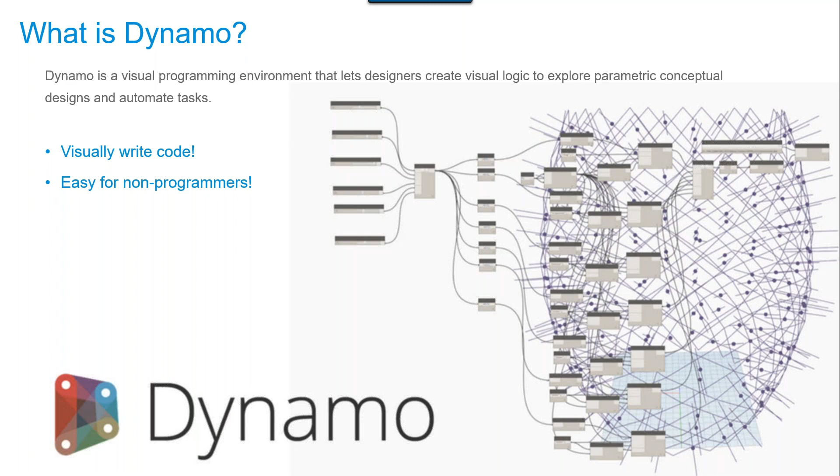But before he shows you how to work inside that environment, we want to talk about why you would want to use Dynamo. So we came up with our top 3 reasons why you would want to use Dynamo, specifically in Civil 3D. Number 3: you can create many design options much faster.

Imagine your last land development project where you had to create a number of different sketch plans for your client. Let's say you had to lay out a parcel of land and divide that land up. You can spend days brainstorming and laying out parcels and different sketch plans. You give it back to your client, they don't like any of them, they wanted to do something completely different, and now you're back to the drawing board.

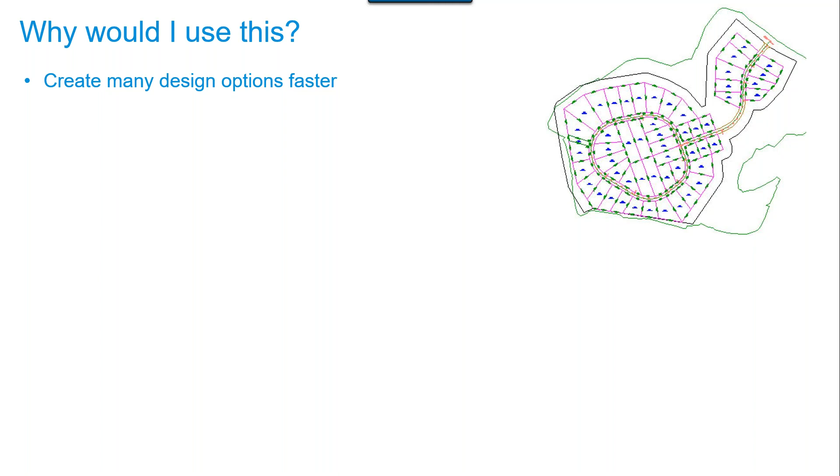So using Dynamo, you can actually enhance some of the Civil 3D tools like parcel layouts and automate different parcel layouts at the click of a button, which ultimately provides you less work and better results for your client.

At number 2, we can also access the data within Civil 3D. We all know there's a lot of information inside our designs, and we want to be able to look at that information and do something else with it. Dynamo works directly with AutoCAD and Civil 3D objects, things like alignments, Cogo points, layers, lines, text, etc.

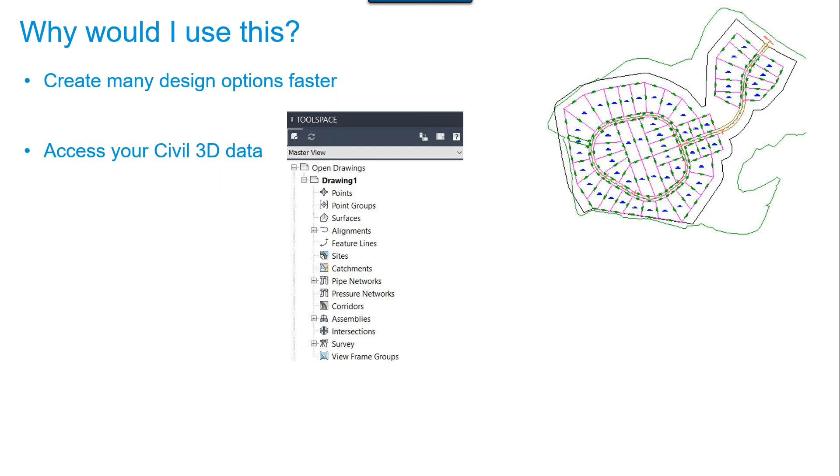And last but certainly not least, the number 1 reason why we use Dynamo is to automate our repetitive tasks, ultimately reducing the number of clicks and picks.

I don't know if any of you have heard of Matt Murphy. He's a seasoned speaker, and he said something in one of his classes that really hit home with me. He said working faster does not make us more productive. You could know several commands really well, but the only way to be more productive in AutoCAD or Civil 3D is reducing the number of clicks and picks. That's really why we use Dynamo, to reduce the number of clicks and picks and ultimately make us more productive.

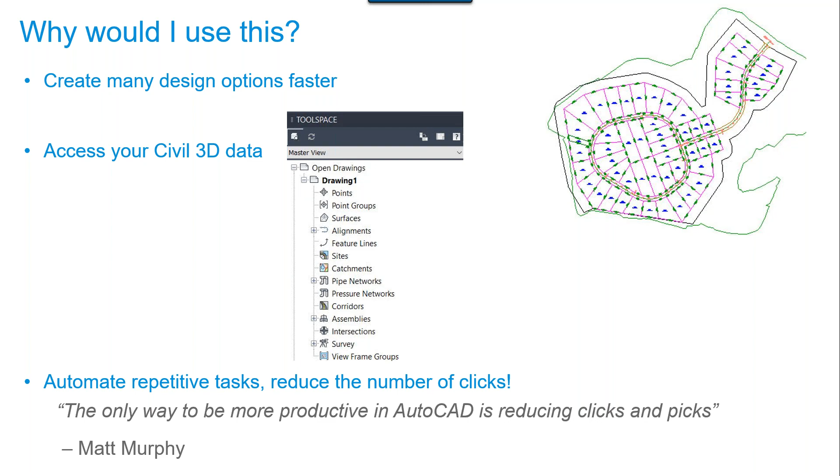So with that, I am going to pass it off to Dylan here, who's going to walk you through one of the challenges that we've laid out to ultimately reduce those number of clicks and picks. So Dylan, I'm going to pass this off to you at this point.

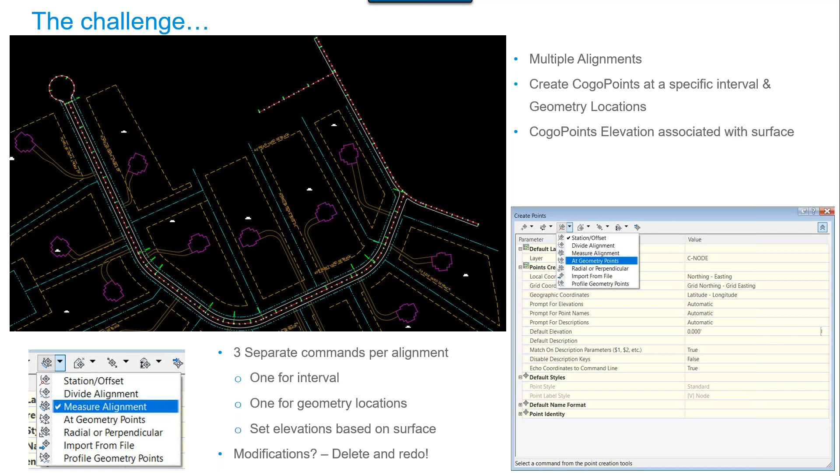So this is a screenshot of the end goal of our script or graph, as Stacy mentioned. The first step is we are going to get all of the alignments that are in the current drawing, and then we're going to get those stations at whatever specific interval and geometry points at the same time.

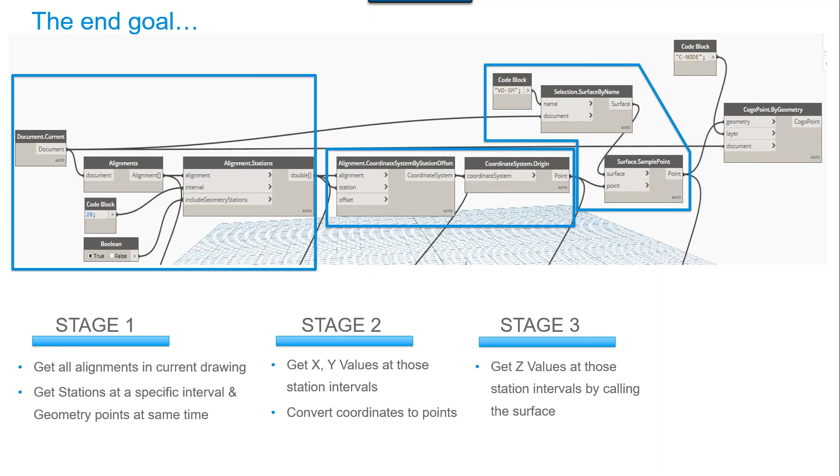After we have these station locations, we're going to have to get those X, Y values of where they actually are, and then we'll convert those coordinates to points. Once we have our points, we need to get a surface elevation, that Z value.

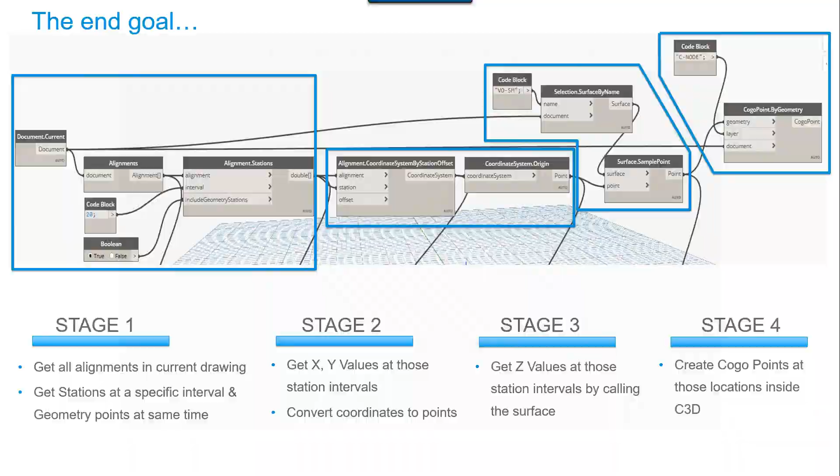And so we're going to have to select that surface and then grab that Z value. And finally, once we have all of that information, we are going to use it to create a Cogo point at those locations. And with that, Michelle, if you could pass the control to me, we'll hop in the program and we'll show you what we can do.

All right, you see my screen? Yes. All right, great. So here we have a Civil 3D drawing file, and you can see here we have a number of alignments that run through the roadways.

And on the Manage tab of Civil 3D 2020, to the right here, you'll see there's this visual programming tile. And here there's an option to open Dynamo and also open Dynamo Player. Now, Dynamo Player is a recent addition in the latest update for Dynamo, which allows you to actually run a script without ever being inside Dynamo.

Also with Dynamo Player, you can set input questions, and so if you need to specify something, a user can do that without entering Dynamo. So this is very helpful for someone who doesn't even want to enter the program, but still wants to get the benefit of the script or graph that you create. And that's going to be, we'll show you how that works inside the program as well.

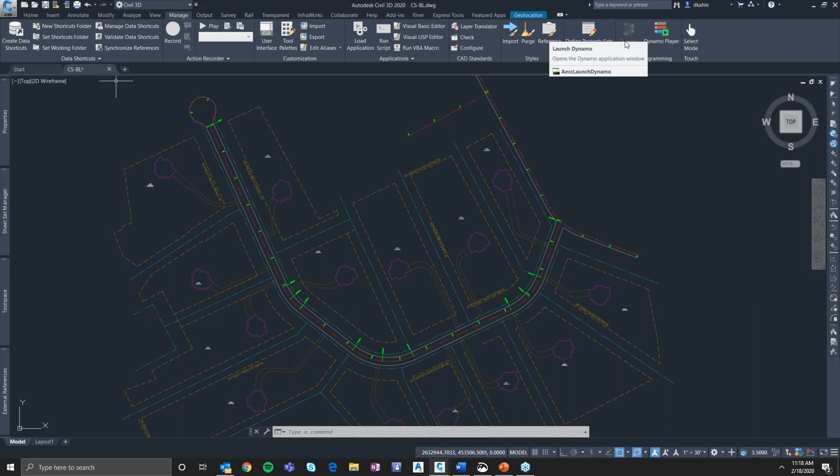Now I already have Dynamo open here. So once you launch Dynamo, you can create a new script, and this is the Dynamo interface. Now this big white area is where the script is going to be created. And also in the background here, you actually can visually see if you are creating something, where it is and what it's going to look like.

Up in the top right here, we have the ability to change the view if we want to see our graph that we're creating or the 3D background. And then to the left here, we have our library of nodes. This is where we're going to spend most of our time. These nodes are categorized and then subcategorized based on their action.

On the bottom left, we have the ability to change the program from automatic to manual. We're going to change it to manual for this current phase as we want to see the actions of what we are creating as we are creating them. And we want to be able to test it, and we don't want it to run automatically.

So again, reminder of our challenge, we are trying to create COGO points in our current document with a specific interval along the alignment. So first things first, as Dynamo is a very specific program and very picky program, I would almost say, you have to be very specific with what you want to do because you have so many options and there's so much power that you can have with it.

So first, under this AutoCAD library category, and then the subcategory of document, we can see we are going to grab the current document. Now, when you're looking at this library, you can see that when you hover over a node, it shows you the name of the node, and then also the inputs that it's going to require and the outputs and a description.

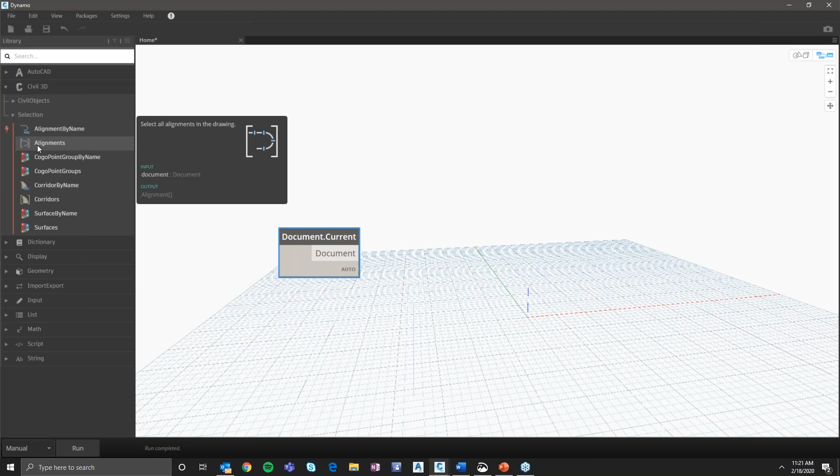Now that we have this document, we need to get all of the alignments out of it. Alignments are a Civil 3D object, so by going over Civil 3D and then selection subcategory, we can see we are selecting alignments. The description shows us select all alignments in the drawing, and the input is the document, which is perfect because that's the output of the previous node we already have. By left clicking again, we see we have this input of document, and the output is the alignments in the drawing. By left clicking, we can drag and drop and move and organize this node around however we want.

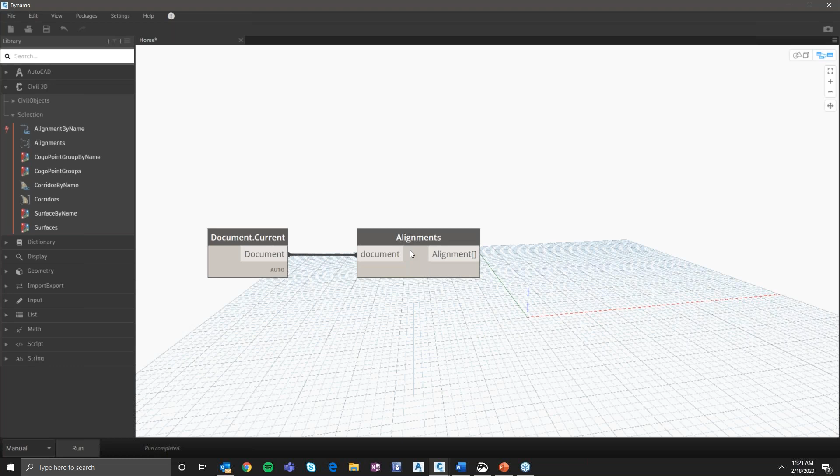To connect these nodes, it's as simple as left clicking on the output, and then you can see we have this dashed wire, which is looking to connect to another node. By left clicking on that input, we see these nodes are connected. So let's go ahead and run this.

And we see here that we have 4 alignments that are in our drawing, which is perfect.

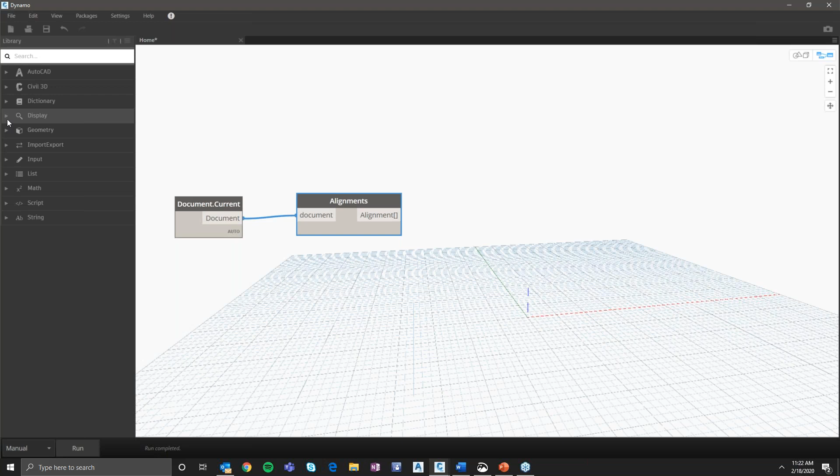Another thing Dynamo allows you to do is have a watch node so you can see what's going on as you are creating it without having to hover over this output. By going to the display category and then the watch subcategory, we can get this to visualize the output of the node. We can do this in 2D, 3D, or as an image if there was an image that would be created, but for this it's just a list. So we will left click and we get this watch node.

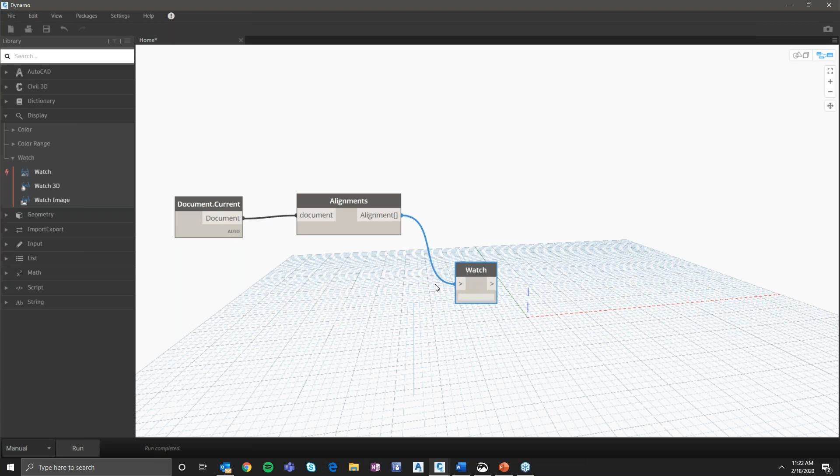By left clicking alignment output to the watch's input, if we then run the script, we now have this list that we can see throughout the document as we continue.

Now that we have our alignments, we need to get the stations of the alignments. Alignments again are a Civil 3D category, so we'll select Civil 3D, and then for this we will go to Civil Objects. Here we can see what is currently available for us to interact with in Civil 3D. We can interact with alignments, civil objects, civil COGO points, corridors, and surfaces. So this is still alignments, so we will select alignment.

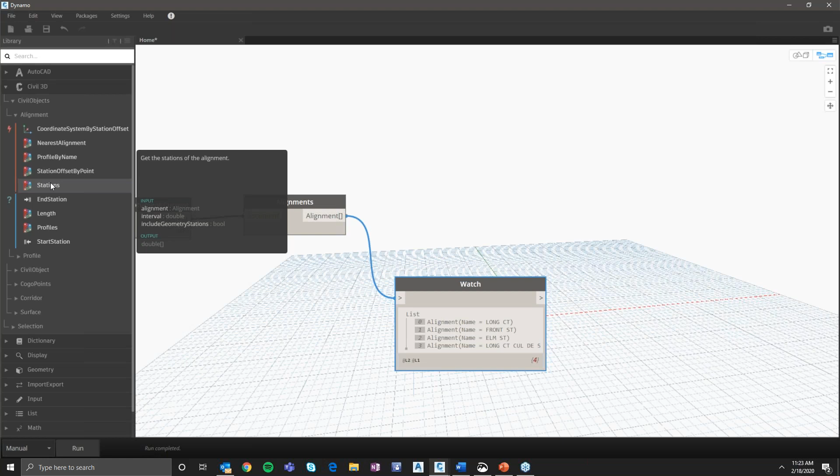And then we see this stations input here, which gets the stations of the alignment. By left clicking, it enters into our interface. We can drag it so it's not overwriting our watch node there. We can see here we have 3 different inputs. The first thing that it's asking for is the alignment, which is perfect because we already have all the alignments in our drawing. So again, we will left click and then left click again to connect that alignment.

Here we see that it's requiring an interval. Notice when I hover over it, we see this double. That's because it requires a double input, which double is essentially another word for a number. Certain inputs have specific requirements that they must fit, such as whether it is a number or a string or text value. So for this, it's requiring a double, which is a number.

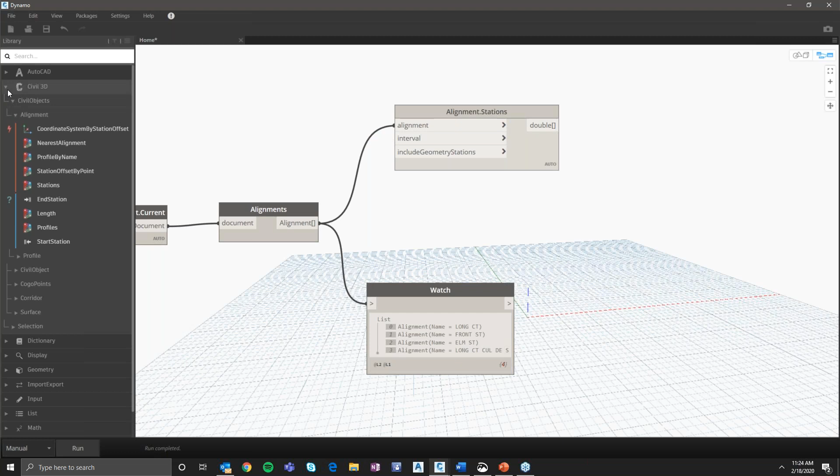So we will go to the input category. Now keep in mind, let's say you didn't know what a double was. If you were to search in the library in the top left, you'll see by searching double, we get all sorts of number inputs. So Dynamo kind of helps you figure out those coding syntax requirements, even if you don't know them.

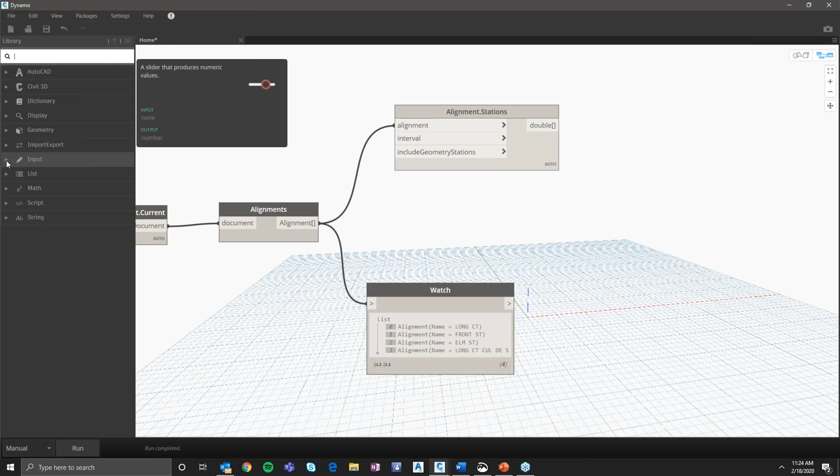So again, if we hover over this input and then basic, we will get this number input, which creates a number. By left clicking, this enters into our drawing, and we simply left click and then left click. Notice here how the output is a double and the input is a double. Let's say we wanted to go ahead and make it every 20 feet.

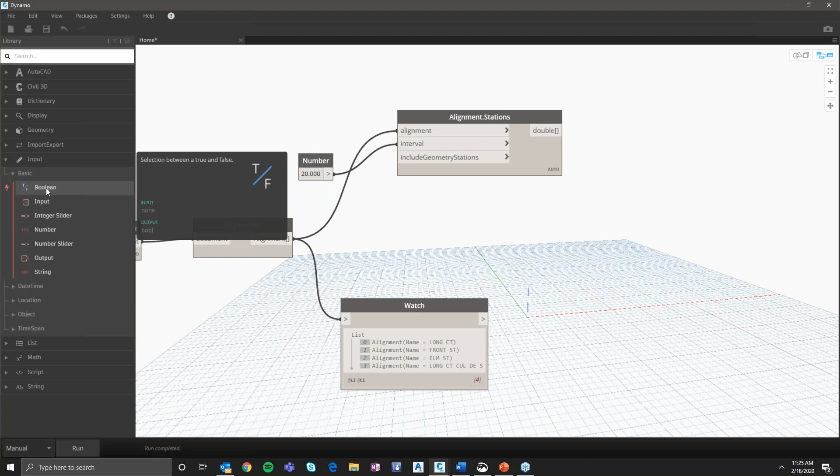Next, it's asking us if we want to include the geometry stations. You'll see this bool here, which means Boolean, which is an algebraic expression for true or false. You can see here it has a default value of true, which is what we want for this challenge, but in a future script we may not want to include those. So we're going to be under the same input basic, and we're going to use the Boolean input node, which allows us to create this selection between true and false.

Again, we left click and drag, and then connect that Boolean true to the include stations. You can see here the graph's already starting to get a little cumbersome, so it's important to stay organized and keep all of your nodes in line and make sense, especially if someone else is going to be in this graph later.

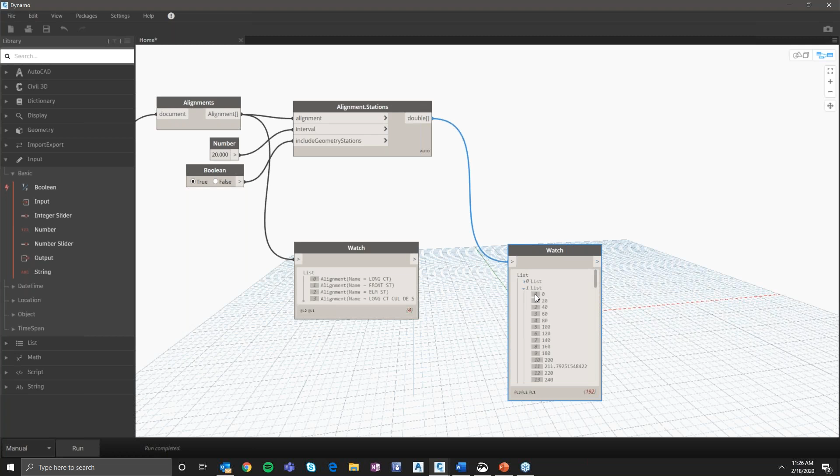Now, if we want to see the stations that output from this, we can go ahead and Control-C and Control-V to copy that watch node, then connect it from this alignment stations to that watch node. If we run this, we see we have every 20 stations for each of the 4 alignments plus the geometry points, so we have 4 lists here for the 4 alignments. It starts with 0 for the first list, so it should be 3 for our 4th list. Then we can see we have all 192 stations for our selection.

Now, once we have those stations, we need to get the actual coordinate system point for those, where those points or those stations are. So we're going to go ahead in Civil 3D again, Civil Objects, Alignment, and we are looking for this coordinate system by station offset. The description here is the coordinate system for a specified station and offset.

So by left clicking and dragging this to the right, we see it's asking us for the alignments which we want to create these coordinate system station points for. Clicking alignment, and then dragging it over here to this input. And then for station, which is asking for a double, which is perfect because that's what we already have.

Switching double to the station, and then that's connected. The offset, we do not want any offset, and we can see this has a default value of 0, which is perfect. Let's go ahead and copy this watch node, paste it again, and then connect this coordinate system output into the watch node.

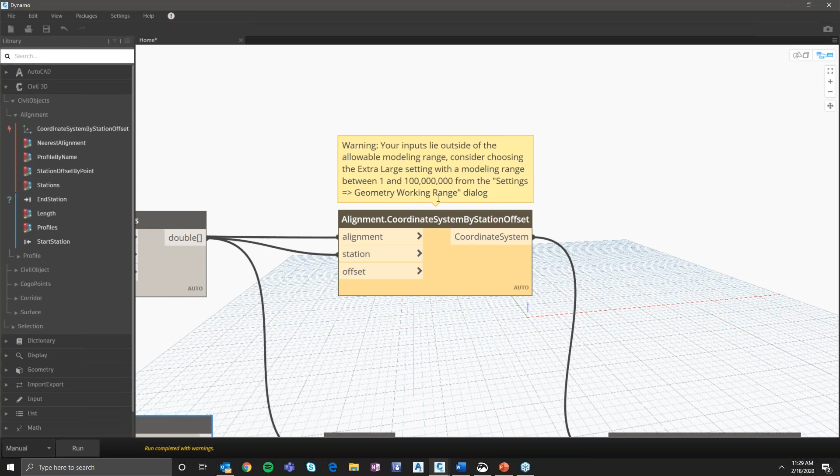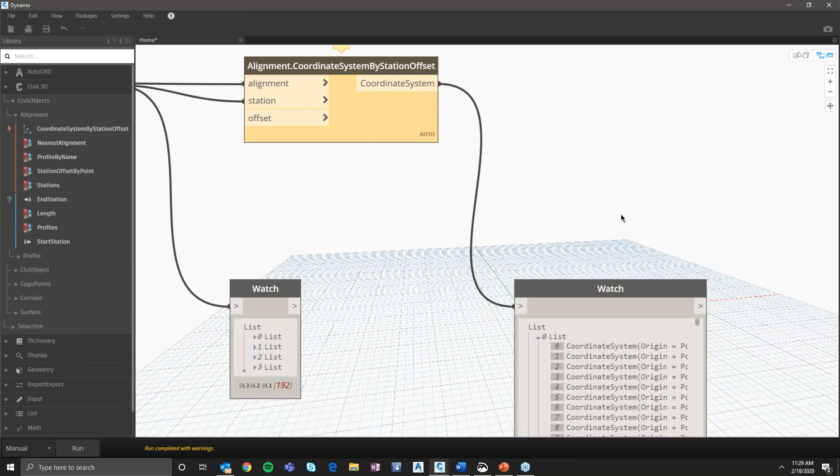What that essentially means is, as you saw in this background, this is where it is modeling where we are in the drawing. The range is either large, medium, or extra large, and that has a certain allowable range. In this case, extra large allows it to go to 100 million. If we look at the results for our coordinate system, we can see that our points are well beyond the large amount, and they are in the extra large range, which is why it's warning us essentially.

If we go up to settings and geometry scaling, as it warned us, by switching it to extra large, if we apply this change and run, that warning goes away. Now, the reason that it's set to medium by default is that extra large and large modeling ranges can, in some cases, cause performance issues or crashing because it becomes such a large environment. But luckily, we're running a pretty simple script here, so we're okay with going to the extra large range.

Now, once we have our coordinate system, we need to get our actual point from that third stage in our script.

From experience, we know that we need the coordinate system origin, which again is going to be very hard to find. So again, Dynamo allows the library search, which makes it much easier.

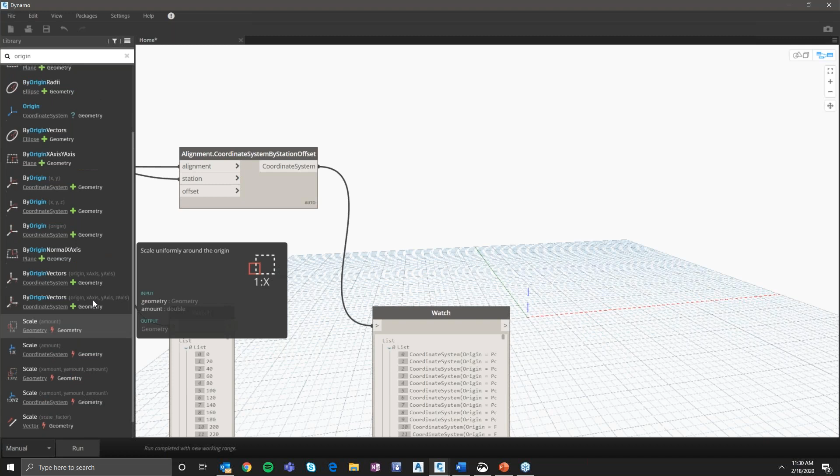We can search for the origin with at any given point, a point representing the coordinate system origin, which takes that input of the coordinate system and the output of a point. By left clicking, that enters our drawing space, and we see that input it's looking for is a coordinate system, which is perfect because that is our output currently.

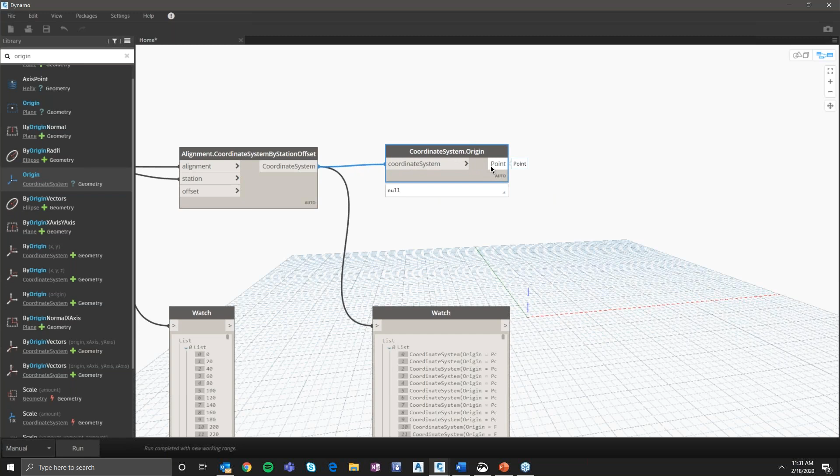So by left clicking and left clicking, those two connect, and then we see we have that output of a point. We can again copy this watch node and connect the point into there. You'll see by running this, our first point here is a coordinate system at this X, Y, and Z value, and on this watch node it's now just a point with that same X, Y, and Z value. But then of course you'll notice another thing is wrong here.

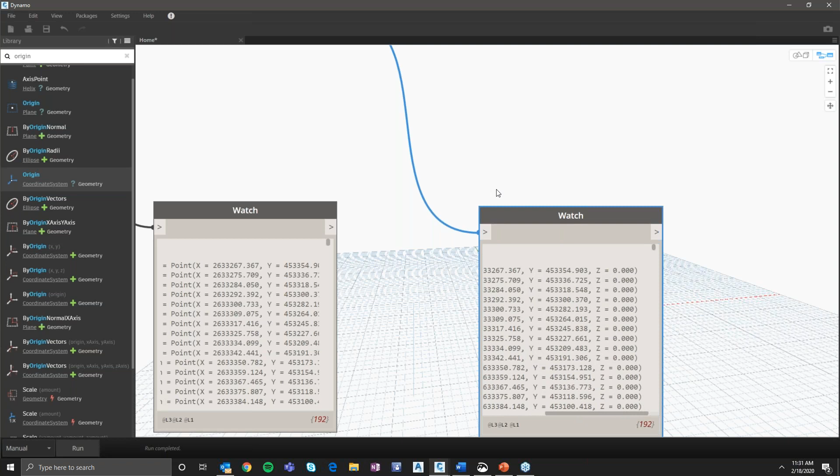The Z value is 0 for all of these points. So we need to get a Z elevation pulled from a surface.

Now, surfaces are a Civil 3D object. So we will again go into Civil 3D, Civil Object, and then under Surfaces, we see we have a few options here. If we were to look at this elevation by XY, that seems like it might be what we want, but we see here that the input is a surface and then an X coordinate and Y coordinate as a double, and then outputs as a double.

And that's not what we want. We don't want to have to break up all of our X's and Y's, convert them to doubles when we already have them as points.

If we look at this sample point here, we see that the input is a surface, and the other input is only a point, which is what we already have. And then it will output it as a point, which is perfect. So by left-clicking sample point, this node enters our interface, and we connect the point output to that point input.

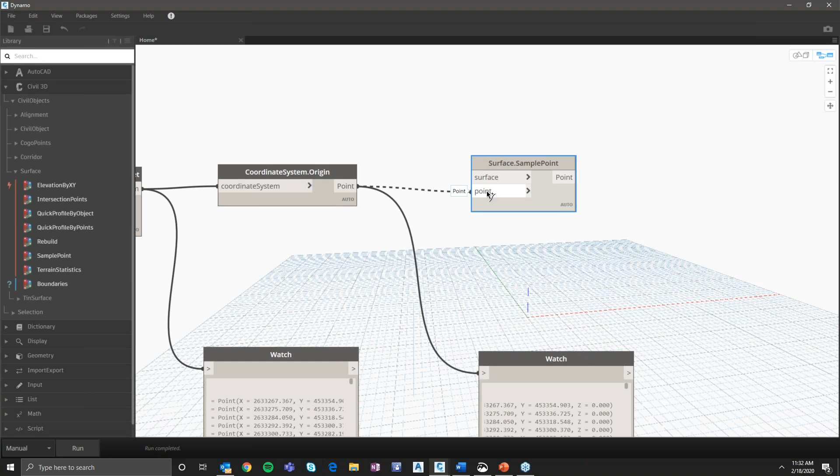Now, of course, we need a surface. We need to specify that surface. So we need to go back to Civil 3D, but since in this case we're selecting a surface, we go under Selection, and we see we can either grab a specific surface by name or just grab all the surfaces in the drawing. For this particular drawing, there is only one surface, so we could just use this one, but in the case of multiple surfaces that will come up later in design, we're going to want to specify the surface by name. So by left-clicking, we get the Selection Surface by Name.

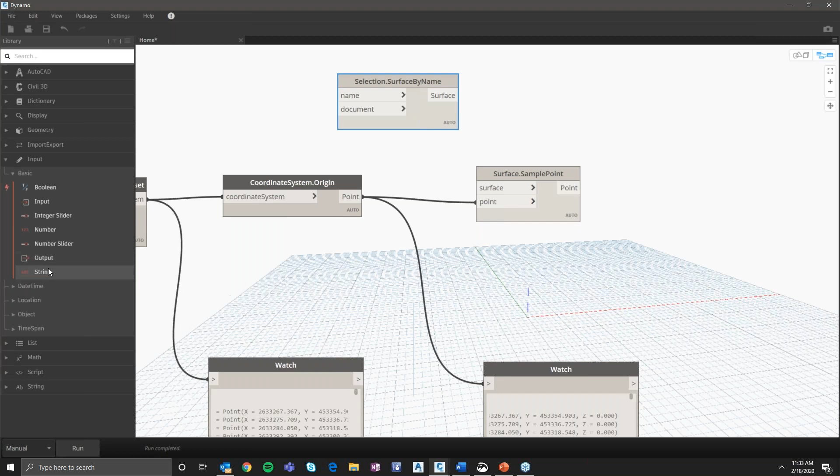Now for the name, it needs a string. If you aren't sure what a string is, you can go to the library and search string. You'll see that it's essentially ABC, a text input. So we're going to input and basic. We get this string input. By left clicking, this enters our interface and we can drag it right to the left here since it's a left to right input to output, and we'll connect that into the name.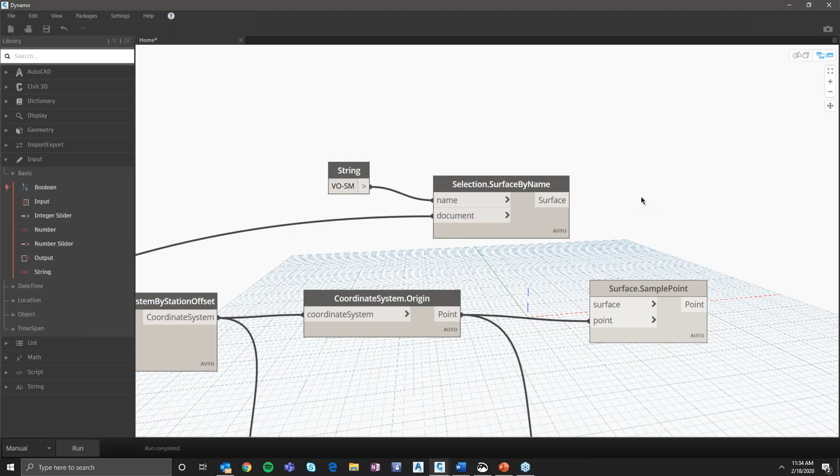Now for the document, if you remember when we first created this script, way in the back, we have this current document. So we'll go ahead and click and drag that all the way back to the selection surface by name. And now for this string, we just need to enter in whatever surface we have in the drawing. Now I know for this drawing, this is the name of the surface, VO-SM. And then I go ahead and connect this surface output to this surface input.

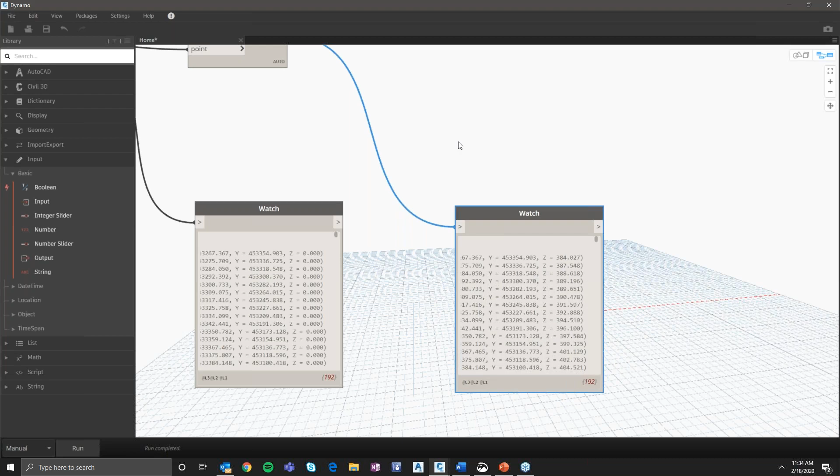Again, I can copy my watch nodes and connect that to the point. By running the script, we have the exact same X and Y's on our points, but now we have Z, which is perfect. This is all the information we want. So now we have these points at these intervals, which we established in the very beginning.

We got the station intervals. We converted them to points. We then grabbed a surface and gave those points Z values. I think now we're ready to create the actual COGO points.

So to do that, all we need is one more node. We go to Civil 3D, Civil Objects, and we see we have this COGO points box. We go down to the COGO point subcategory, and we can create points, COGO points from a Dynamo point, which is what we already have.

As we can see here on the library, nodes have either a question mark for a query, a lightning bolt for an action, or in this case a plus sign for creating something, which is what we're ultimately trying to do. By left-clicking by geometry, we get our COGO point creation node.

Now, the geometry that it's looking for, the input is a point, which is what we already have. By left-clicking point, connecting to geometry, that is satisfied.

Now, if we want to specify the layer for the COGO points, we just need to make another string. So for this, we will go back to input and basic and the string input. And we'll put this on C-NODE, which is our company standard, but you can put it on whatever layer that already exists in the drawing.

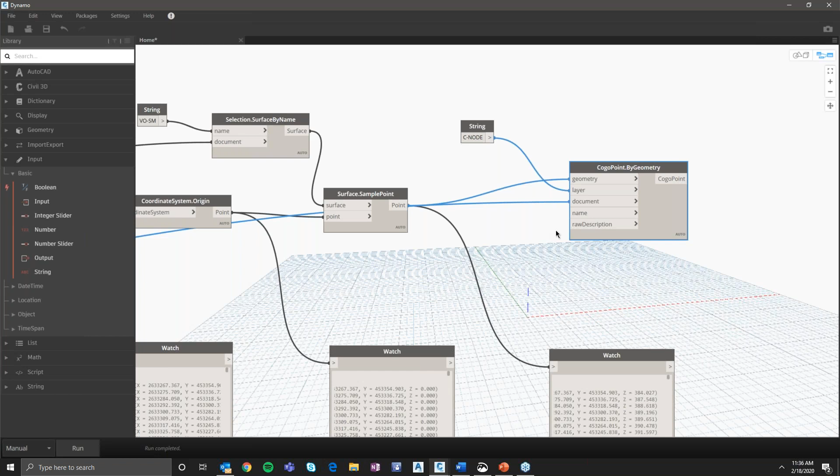There's a few more things we could add if we wanted to add a name to the points or a raw description, but for this, we aren't too concerned with that. And with that, our script is done.

All we have to do now is run the script in Civil 3D itself. And we could do that with Dynamo open, but if we want to take advantage of this Dynamo player, there's one more step we want to do, which is to create the inputs for the player.

By right-clicking any of these nodes that are inputs, you can change it to is input. By making it is input, this makes it a Dynamo player editable input. So that's perfect. That's what we want to do.

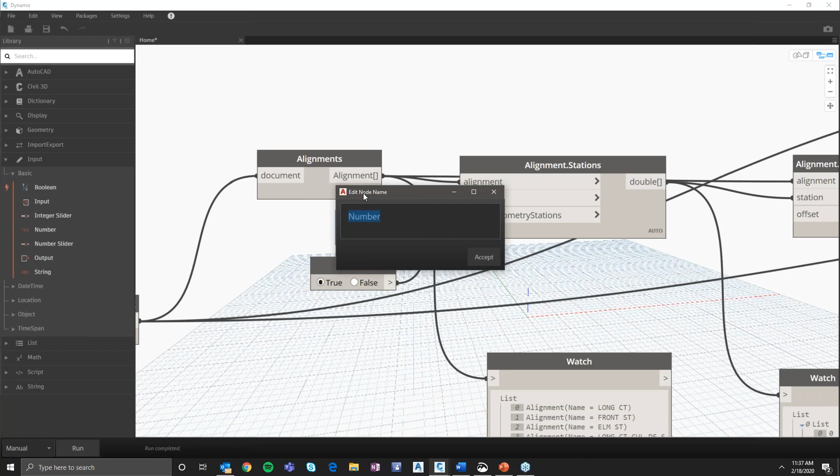But if someone was to open this, they wouldn't know what number means. So we also want to right-click and rename this node. So we can rename this, what interval do you want to create points at?

We can accept that and move it over a little bit. And then again, for the Boolean, if we want to make this false in case they want to include geometry points, we just right click, rename it, change it to is input, and then we'll rename it to ask, do you want to include geometry points?

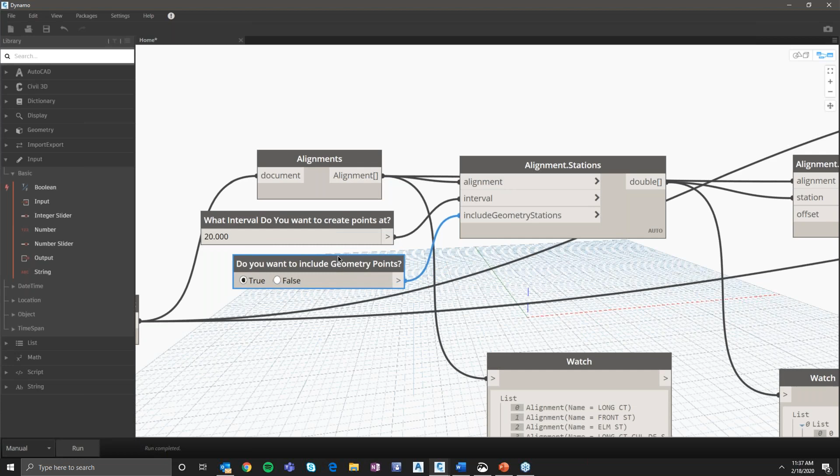And we accept that. And finally, our surface name will probably change depending on the drawing. So we can go ahead and change this string up here to is input. And then we also right click and rename the node: Which surface do you want to use for Z values?

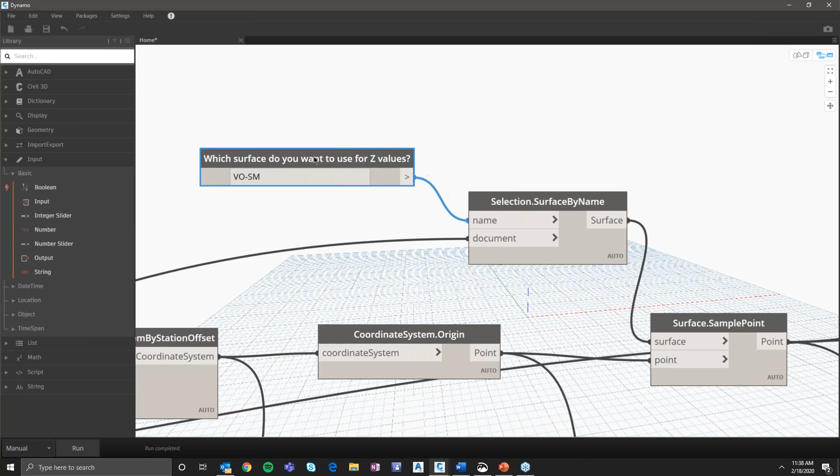And now at that point, our script is done. All we have to do is save it. So typical, Control S or save up in the top.

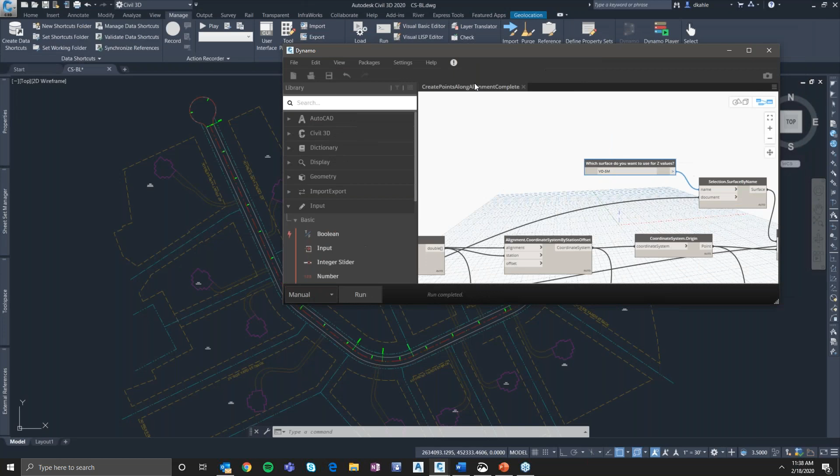So you can see here, we're back in our drawing. Up on the top, we click on the Dynamo player launcher, which launches this Dynamo player.

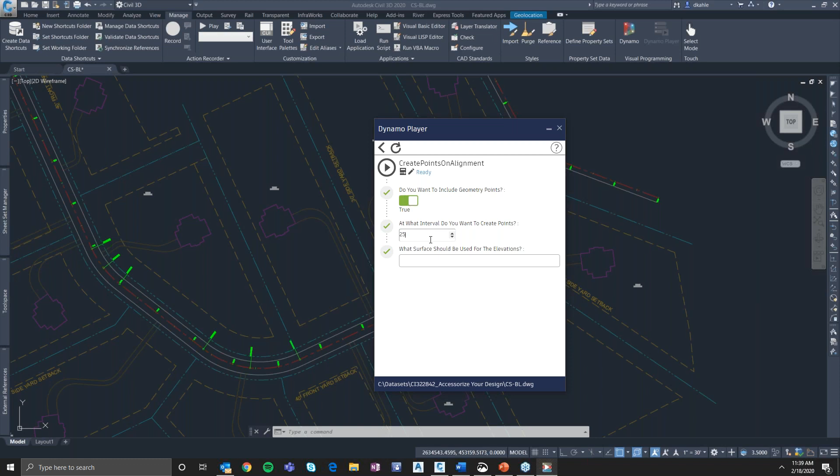We can modify this interval to whatever we want it to be. Let's say we want to do 25. And for what surface do we want to use in the elevations? Again, under the tool space, we can see that we have this VOSM surface. So we will change it to that.

And then once we're ready, we go ahead and hit play and run the script. And just like that, we have multiple.

Yep. Oh, I'm so sorry. I didn't mean to cut you off there. I thought you were taking a breath. Go ahead. I was gonna say, yeah, once we hit play, then it just creates these points.

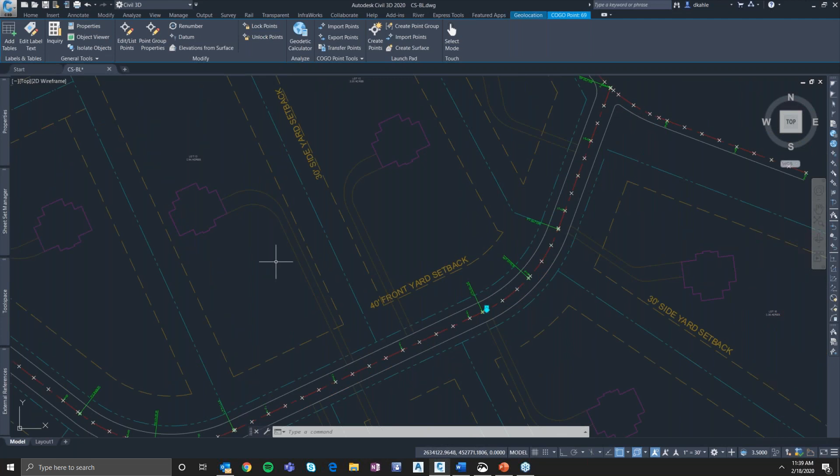And if you look on the properties of these points, they have these elevations associated with them. We have them at every geometry station, and we have it every 25. And just like that, if anyone else needs to add this to their drawing, all they have to do is open up the Dynamo player and change whatever inputs they need, and it's done in just one click.

So what was your question? Sorry about that, I didn't mean to interrupt.

No worries. Nick and Alan have a very similar question, which is probably the logical next step in our thought process. I know this might be more advanced than we can cover today, but let me make a statement and you correct me if I'm wrong. There is the ability for us to add a list, so you could choose the surface or alignment in your Dynamo player to pull that data from.

Yes, because you can change things to be input or output. In just a quick 15 minutes we couldn't really get into it, but you can have certain inputs and then use those for outputs, using them as inputs, and getting those lists and then using what's available to you.

Yes. I hope that answered your question, Nick and Alan. If not, please let me know.

So that is a quick, very quick intro to Dynamo. There's a lot you can do within Civil 3D or AutoCAD, and I think the beauty of the Dynamo player is that if you enjoy creating these scripts, which is much easier than with LISP routines, you can share them with other people in your office or online, since it's very easy to change these inputs and everyone can use them in different environments.

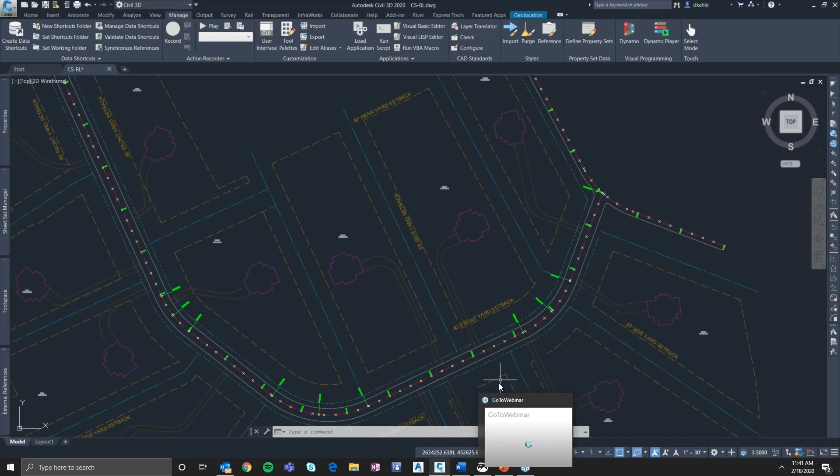Should I hand back control to Stacy? Did you want to present more? Okay, yep, we just want to talk about the Dynamo community a little bit, and then that'll wrap up our presentation portion, and we can certainly answer any questions anyone may have. Perfect.

There are some sample files included in the Dynamo installation. If you go to the help menu in the Dynamo interface under samples, you'll see a few beginner samples to get you an idea of the workflow processes inside Dynamo. And if you still need more help, there's a user guide online and a node dictionary, which will help you determine what each node does.

And if you want to get into more advanced topics, you can also learn Python, which can be integrated with Dynamo. There's a lot more information out there, including the full-length presentations Dylan and I gave at Autodesk University this past year, as well as other resources from other Dynamo classes given at AU. Please feel free to check that out. If you have any questions, Dylan and I are online and more than happy to help and continue improving this community.